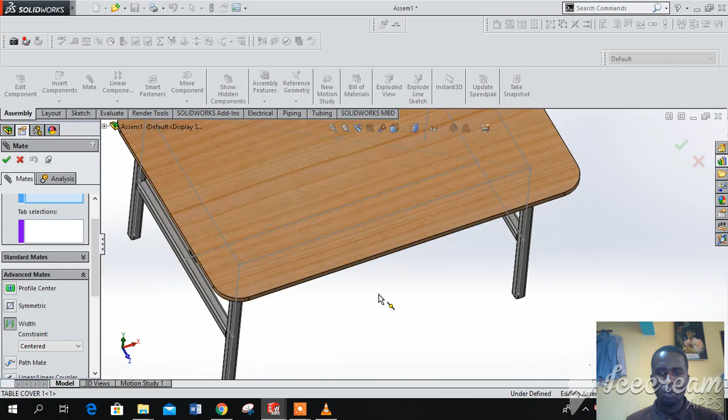We need it in the middle to be symmetric. We go to mate command, we go to the advanced mates, we go to width, then we select this side of the table cover. Select also this side, then we select the frame, that side, and also the frame side. Okay, there we are good to go.

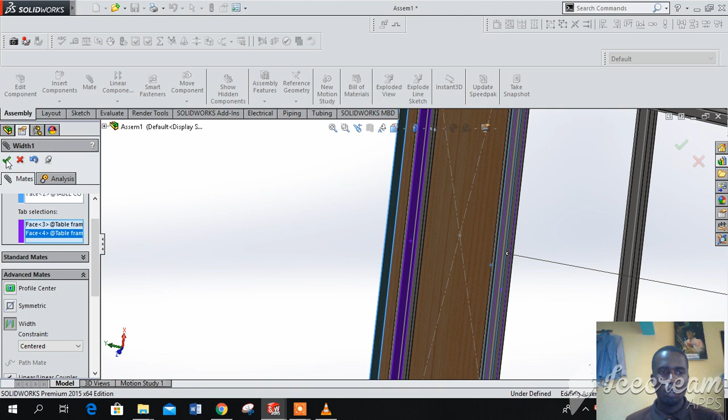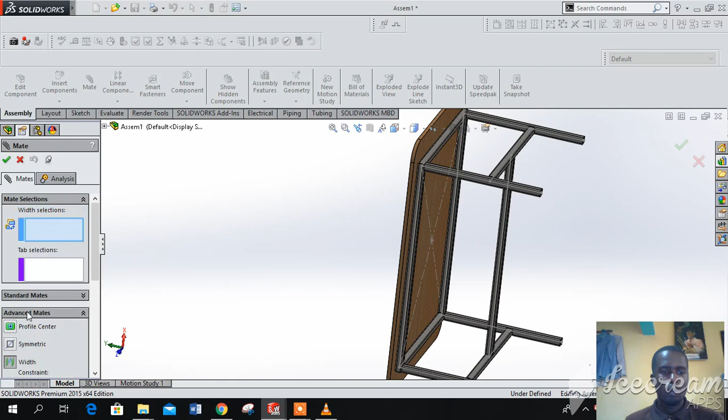So we can also bring out the mate command again. Then we are done with this, the longest side. Then we need the width also to be symmetrical, we want it to balance very well, so this feature can hold here. So this one we need to select that side of that table cover, select also this side, then select the frame, can do that.

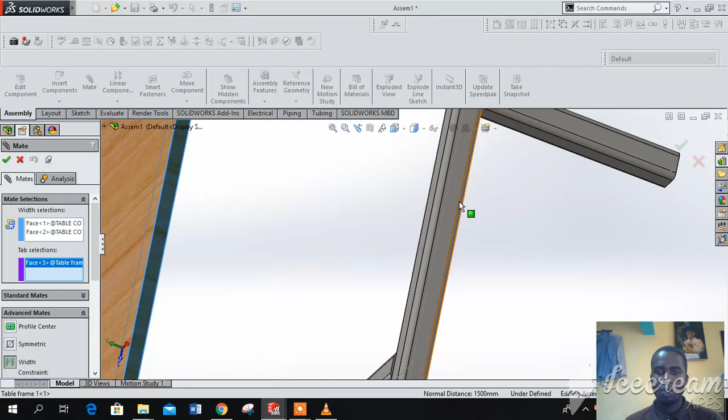And also do that. This one is also. It's also done. We have our table, the frame, plus the top. Okay, that's the frame plus the top. You can try to see it from different views.

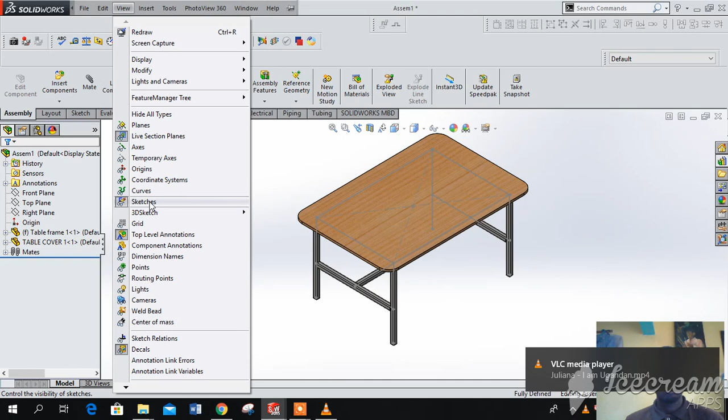Or maybe why these lines are somehow appearing, the sketch lines, we can put them off. We're just switching off sketches. We have our table, it's not about the colors on the surface. That's our table that we managed to design.

SolidWorks is some simple software, when given time anybody can teach it to him or herself, like I did. So slowly by slowly you get to master how different commands work, how to use them, how to be faster. In the coming series, in coming episodes, I will be taking you through step by step how to go about SolidWorks.

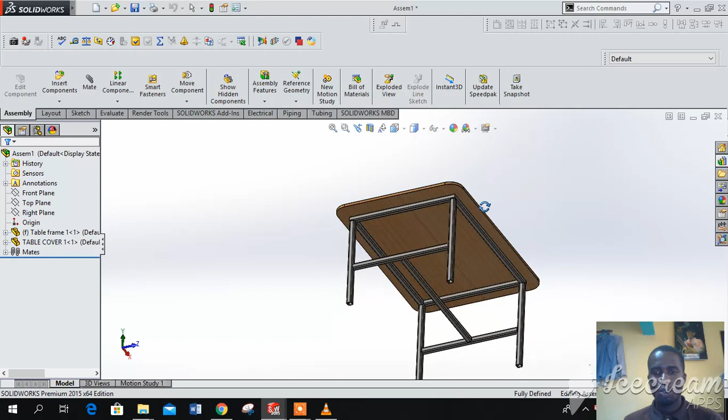Today we managed to design a simple table. This one will only be left with how this top will be anchored to the frame, so it will be by bolts. So we just need to create some holes down there, bolts.

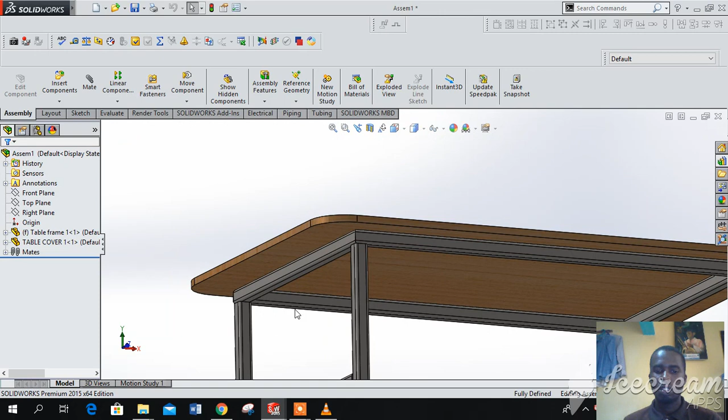This is it for today. We managed to design our table. The frame is metallic and then the top is wooden.